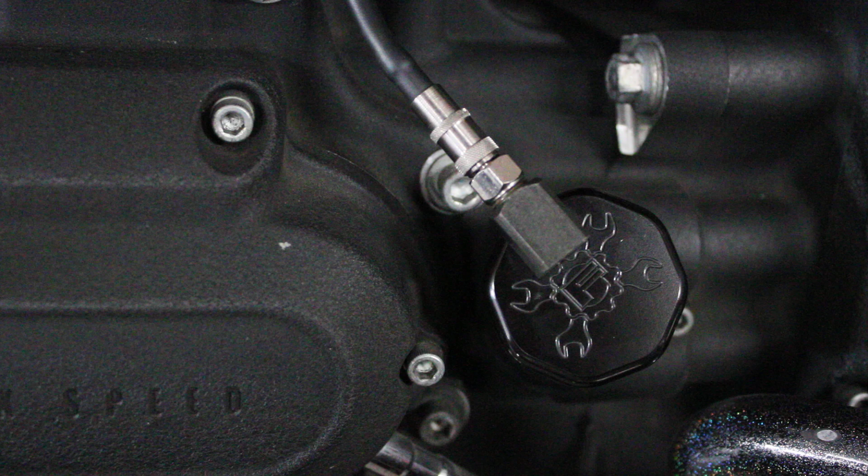So this was something interesting, playing with the dyno that we had found. Just a little test with these Feuling vented dipsticks. We're gonna take a walk into the dyno room and I'll explain.

Sorry for the non-focus and walking around, but this was something pretty interesting. We put a Feuling vented dipstick on a bike, not that it was a powerhouse bike, just an 88 with a set of cams.

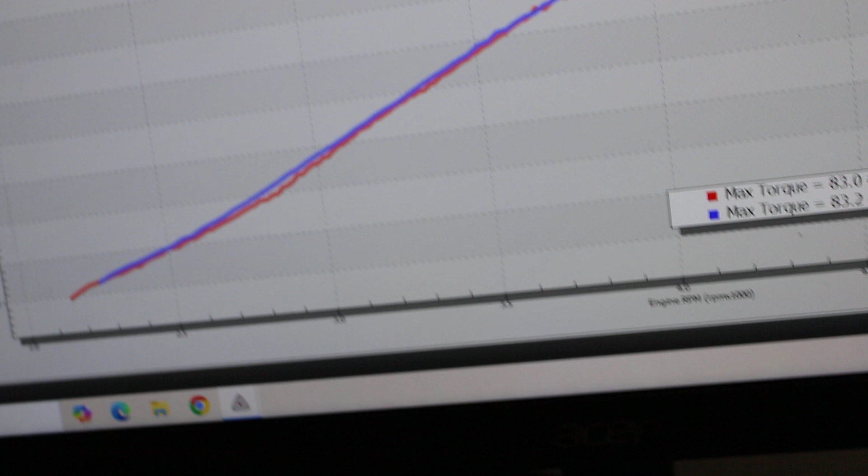Nothing too crazy, but I was curious whether a vented dipstick actually does anything power-wise, or what does it do. And we did a bunch of runs back to back.

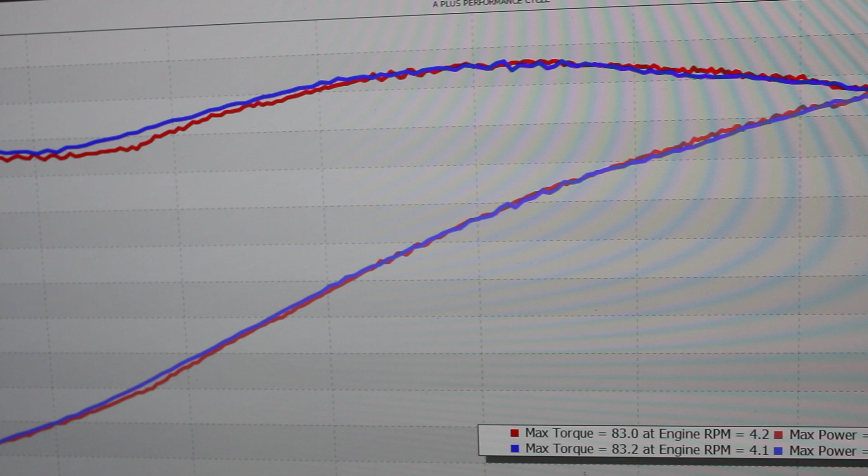The red is actually before we put the vented dipstick on, and I was getting consistent results. That one was probably the most variation, but as you can see, it definitely seemed to help.

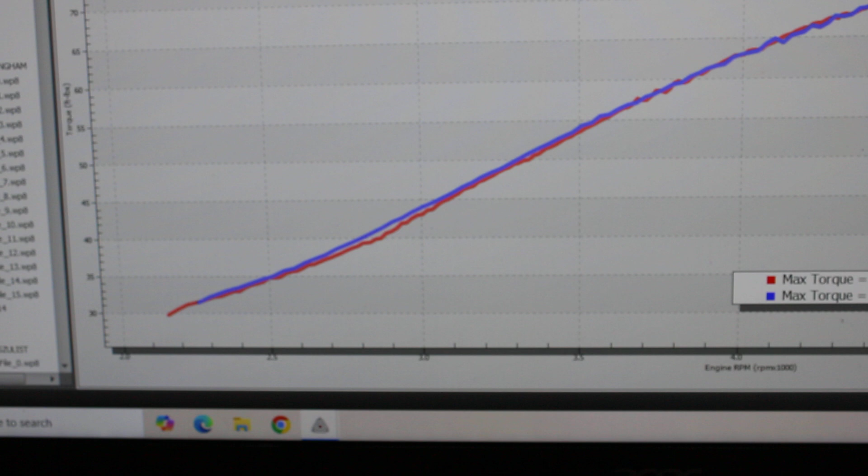It didn't necessarily peak any higher numbers, and I know I've talked to those guys over at Feuling, and they've responded back to me with better throttle response, getting rid of the built-up crankcase pressures in the bottom end, which is all true. We can actually see that there is an improvement.

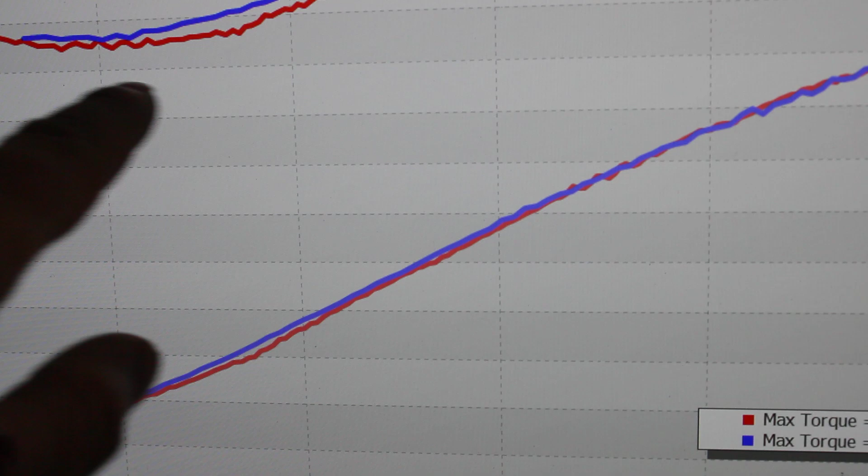Down lower, we're about 2,500 to 3,500, there's a bit of an increase, which I would say is true with the throttle response being a little more responsive, having less pressure in that bottom end.

So some good results. Cool to actually see something work and be able to show it, because there's so many parts products out there that, do they work? Yes, they might, but when you can actually put your finger on it and prove that it does work, that's pretty cool. So something to think about.

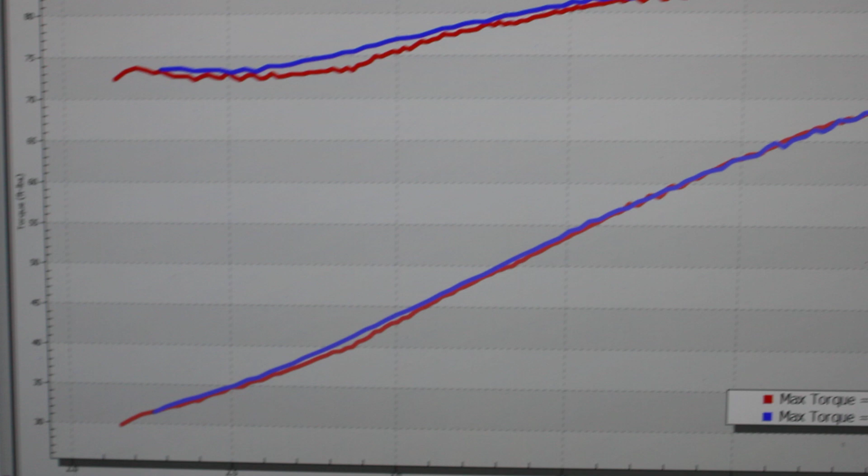We'll probably test this again on something else, but just to kind of show, that's quite significant. It doesn't seem like much, but for a part that you just screwed into your dipstick, that's pretty amazing. So cool info.